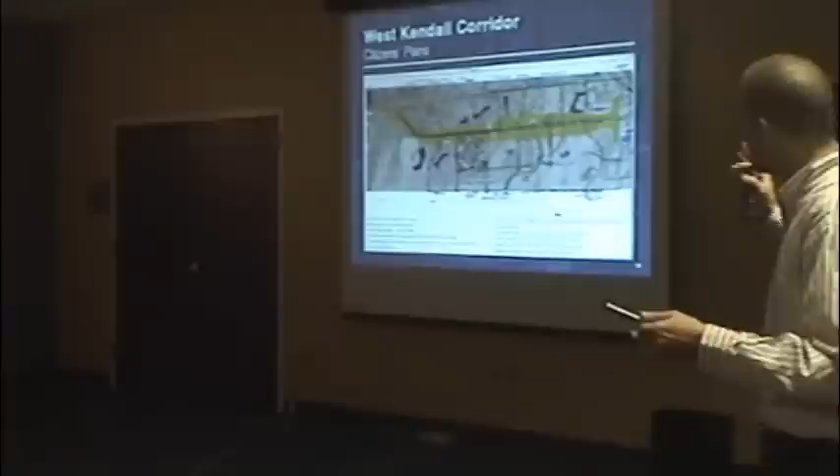Reviewing the actual citizens' plans, you can get an idea of the drawings that were developed and some of the ideas. I won't go through the whole list, but the consensus was mainly those six or seven ideas.

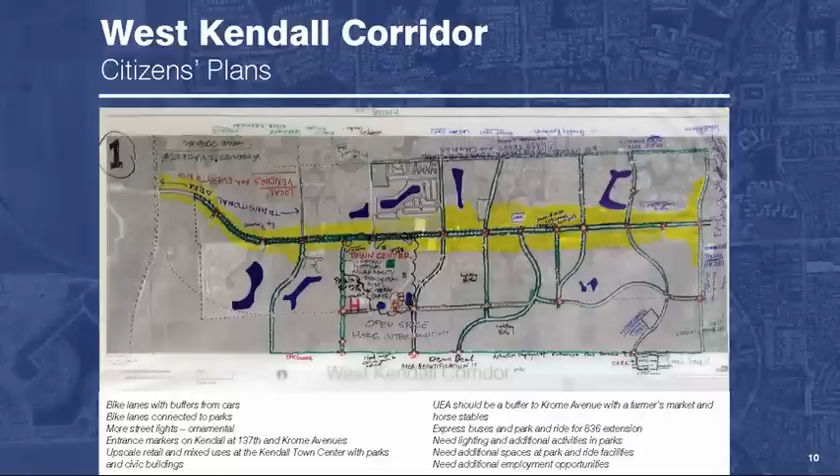You can see the town center, next to Baptist Hospital, an area most people were very interested in and really wanted to see develop into a town center. And then mixed-use development along Kendall Drive, to allow people to live and work in proximity to each other so they don't have to get in their car and drive for an hour to downtown, Doral, or the airport area.

More trees, landscaping, more shade — that was something else critical, because if you want to walk and you're in the sun, there's no shade, it's just not a pleasant experience. Everybody knows that, and it's something we have to work on.

Additional transit service, possibly a local circulator trolley, express buses. People like the Kendall Cruiser, but it's stuck in traffic with everybody else, so that's a problem — and how do you solve that? We have some ideas.

Mixed uses, more amenities, better retail options were also desired, along with a hotel or more. People want to be able to live and play in Kendall without having to go to Coral Gables, South Miami, or the beach, so they can enjoy their community. It's great to have the beach, but it's a hike from here, so it's nice to be able to enjoy your community on the weekends without feeling a need to drive for a half hour or more.

This was the kids' map — you can see we had some future artists there. You can see ideas like the trolley, circulator service, and a farmers market out in the UEA area, or the expansion area.

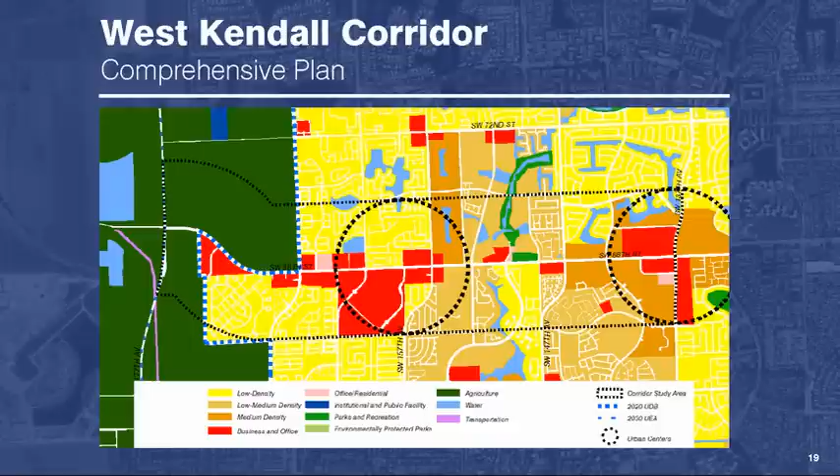The good thing about the urban centers is that they allow a lot of things that you told us you'd like to see, which is mixed uses, pedestrian scale type buildings, and things like that. So we have some planning tools that we can work with that will help achieve what you told us you want to see.

We'll go through the various sections here. The first one is redevelopment. I'm sorry the map is not that great on the projector, but there's not a whole lot of redevelopment opportunity in Kendall because a lot of things are pretty new here.

One exception is the Kendale Lakes Shopping Center at 137th Avenue. I don't know, any old timers remember when it looked like that? If you look at the map, that's actually the old Wometco Movies, right in the middle there.

It's a lot better than what's there now. So yeah, this is what we got now. The mall kind of disappeared, and now it just became a typical strip mall. And you told us that most people are not very pleased with the way it looks and functions right now.

Looking at the redevelopment opportunity here, there's a large parking lot, and it's probably underutilized. So the parking area could be infilled with buildings to try and create a more urban scale along Kendall Drive. Over time, additional buildings could be added.

A kind of pedestrian scale street could be created along the existing strip shopping center, where the parking areas are within actual building blocks. So you have a block system developed over time.

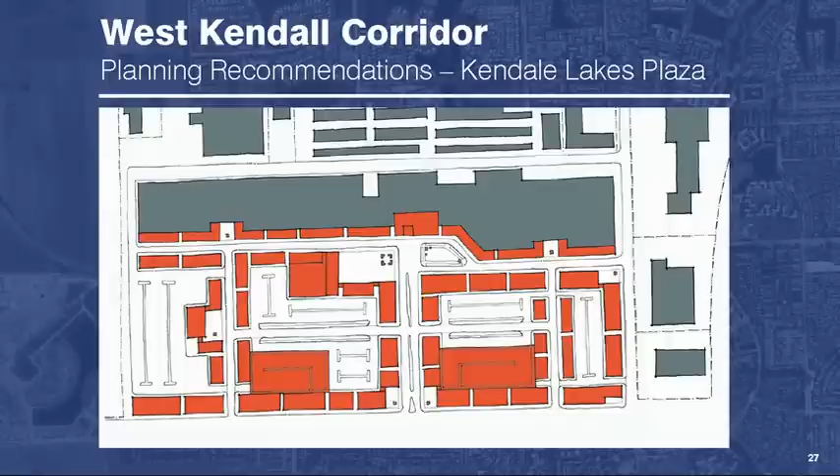And then over the long term, even parking garages could be constructed to allow for sufficient parking, but a much higher utilization of the land.

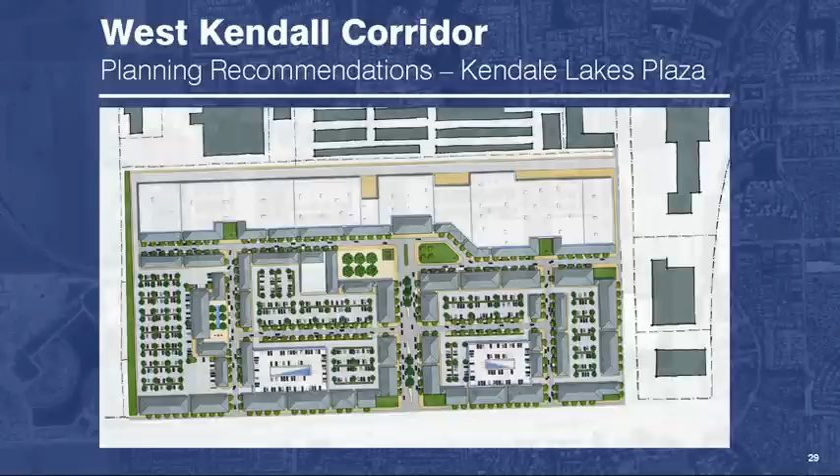And then looking to the north, there's the existing mini storage warehouses, and you've probably seen the trend in the mini storage industry is that they're going multi-level. So these are one-story mini storage buildings, and if they could be put into a multi-level type building, then there we go. Possibly the north half of the shopping center could be redeveloped to something that would be compatible with the residential areas north.

Is this 82nd Street? 84th. 84th. And so the people who live up in Kendale Lakes here could actually walk down a pleasant street scale environment here into a small scale town center type environment.

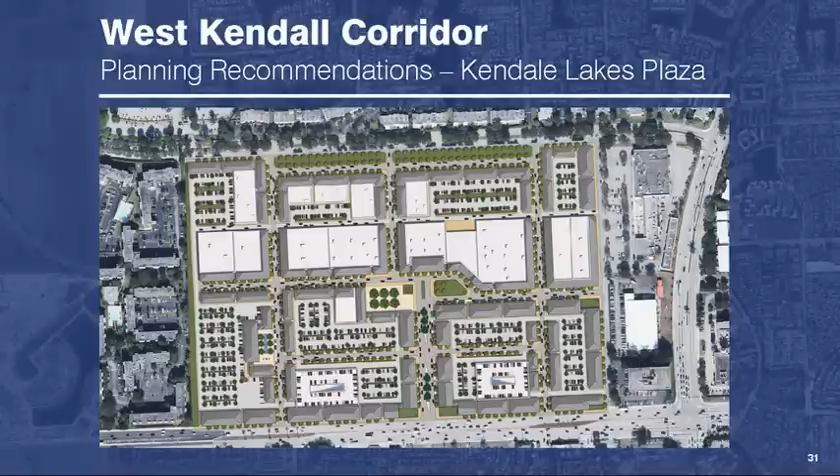And again, so this is a concept. But this is consistent with the fact that this is an urban center, so this type of development will be permitted by our comprehensive plan right now. I just need somebody to come along with the vision to do it. So that's always the challenge.

So anyway, this is about 45 acres, and potentially you could have almost 1 million square feet of office space, 620,000 square feet of retail. There's about 400,000 square feet of retail space there now.

Maybe about 600 units of residential, more or less. This is just an estimation of what could be built there. And even though, remember, you got 45 acres, it's only 15 units an acre at 680 units, and that's about similar to the other apartment developments that are surrounding the area.

So anyway, that's one look at what could be done in terms of redevelopment. And for policies, we have the policies in place through the comprehensive plan. These properties that are located within the urban centers should be developed with the urban center standards.

Mixed uses should be encouraged, and pedestrian connectivity should be required as things redevelop, so people can walk to their shopping areas and so on. The next group of recommendations are street improvements. And there's a lot of discussion about the shade and people want to walk, but the streets are not comfortable enough right now.

This is one example that was brought to our attention: along 152nd Avenue between Kendall and 80th Street, people are parking along the swales, and the swales get torn up, turning into dirt and rocks. It's very unpleasant. If people are parking on the swales, you should have on-street parking instead, because right now you have something that looks very unpleasant and disorderly.

You add a curb and gutter and some little bump-outs for trees in the parking lane, and you get a streetscape that's attractive, yet still allows people to park, because there's obviously a need for parking in the right of way. The other good thing about on-street parking is that when you're a pedestrian on the sidewalk, the stationary cars buffer you from traffic, making it a much more comfortable environment. The additional shade helps as well.

This is another issue brought to our attention: 149th Avenue, south of Kendall, adjoining the Presidente supermarket. Again, you have parking in the right-of-way, and when you don't have curb and gutter, the parking goes into the swale. The swale gets torn up and looks very unpleasant. Adding curb and gutter keeps people from parking on the swale. Having a dedicated parking area keeps the swales from turning into dust and mud pits, potholes. With additional shade, you get a much nicer, pleasant streetscape that people are pleased with.

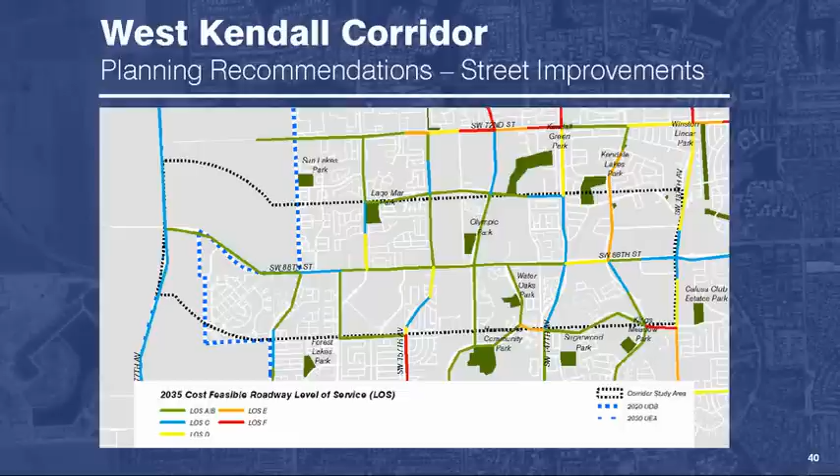So what that means to us is that if you have four lanes right now, and in 2035 it's still level of service A or B, you probably don't need all four lanes of traffic. So what can you do? You can take that 10 feet on either side and add a landscape strip and a bike lane, and possibly take those painted medians and landscape them, and you suddenly have a streetscape environment that people would be willing to use and ride their bike on.

Of course, the challenge is you have existing infrastructure. A lot of these roads were paid for by developers - the county didn't pay for those roadways. So how do you go back and retrofit them, as we're showing here? That's the real challenge. The challenge isn't the technical configuration of the roadway, because there's enough right-of-way. The challenge is how do you go back and fix what people are not happy with.

Another option, instead of the bike lane, is to potentially have a 10-foot sidewalk, wide enough for a shared bicycle-pedestrian facility, because a lot of people told us they weren't happy with bike lanes. They don't like sharing the roadway with cars - people drive too fast, and so on. So that's another option possible within that 70-foot right-of-way, if you don't actually need the four lanes of traffic.

One thing to note is that the congestion is really only at the intersections. So you may not be able to do this when you get close to Kendall Drive - you may actually need all four lanes there. But when you get 500 feet away from the intersection, you can actually start to do something like this.

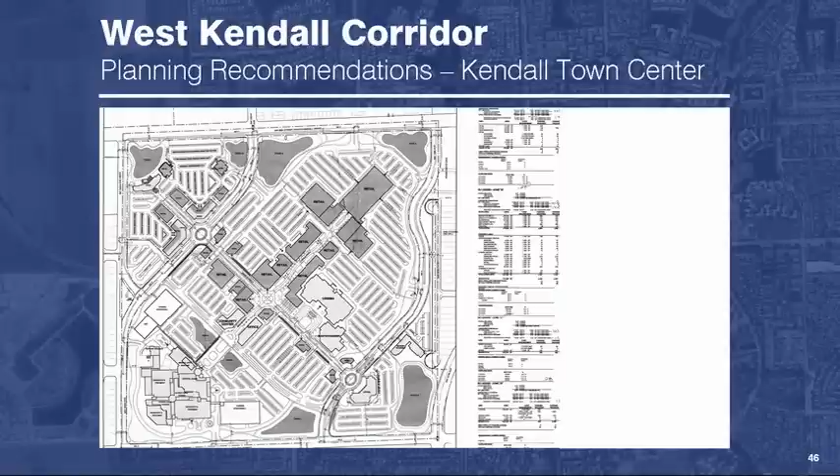So we were looking at coming up with a concept to illustrate both the urban center standards, because again, this is in an urban center, and the concepts that you told us that you'd like to see.

Beginning with the existing roadway network, this is Kendall, this is 96th Street, this is 162nd Avenue. I forget the number here, 159th or something. But anyway...

Looking at the existing development that's already built, the hospital is already here. They own this vacant piece of property here. This is the assisted living that's under construction. And then there's the transit terminal.

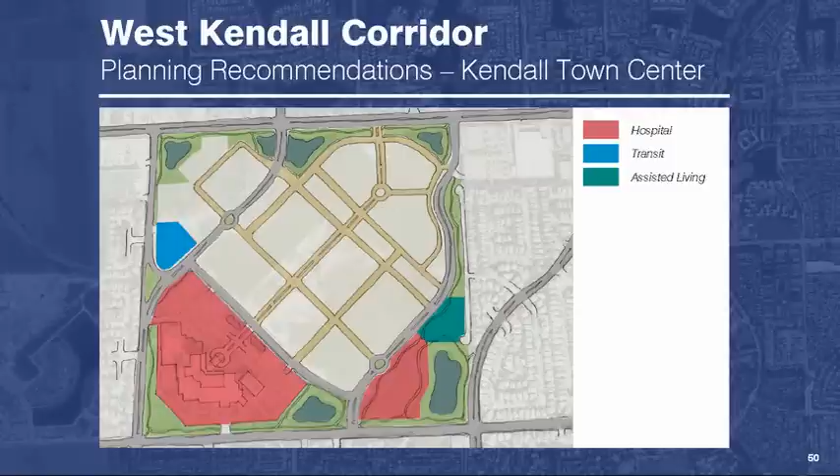The first thing we looked at was developing a block system, because that's important for pedestrians. People are comfortable walking when they know the block sizes and so on.

And then looking at different uses that could fit into these blocks. One of the important things that people told us was additional retail, the movie theaters. That's something everybody wanted to see, was additional movie theaters in the area.

And then having mixed uses, such as residential, mixed-use residential and retail, or residential and office-type buildings. So people can live and work in close proximity, and also close to the entertainment, retail, and restaurants that would be located here.

And then you can see the open space, some additional open spaces that are possible, so people can enjoy, not necessarily come to shop, just enjoy the quality open space.

So this is the concept that we came up with. This is Kendall here, looking to the northwest. This is the existing Baptist Hospital, the assisted living building that's under construction. And you can see the kind of retail complex here with the block system kind of oriented towards Kendall.

And then a significant open space. It could be used for different community events and farmers markets and so on. And then some more retail and these mixed-use type buildings that could contain office space, residential space, retail space, and so on. And again, this is all within a block system that really encourages people to walk around and enjoy the environment.

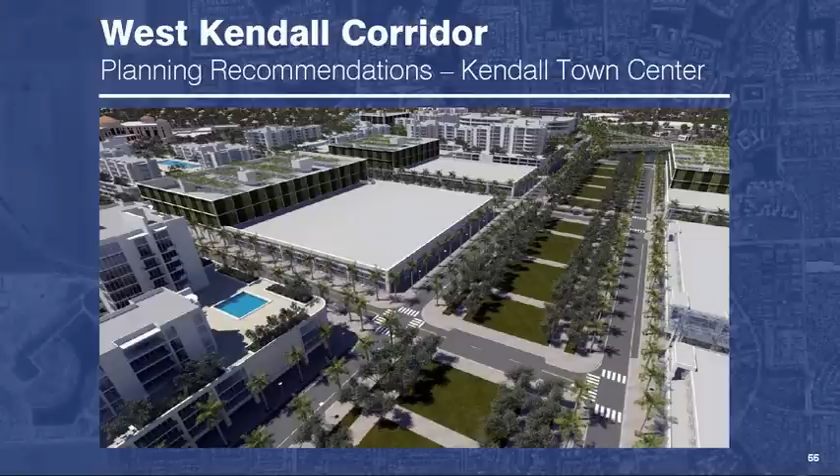And again, you can see the open spaces to kind of connect the whole property together. There's that open space again, kind of between the retail on Kendall and the mixed-use spaces to the south. So anyway, you get the idea.

Well, palm trees are just for illustration. If you do shade trees, they hide everything else.

But anyway, one of the important things here, again, when you have sidewalks along Kendall, and the traffic is going 50 or 60 miles an hour, nobody really wants to walk along that. So it's important that the sidewalks be separated from the travel lanes as much as possible, and with shade and so on.

This is an approved development of regional impact. So what that means is that they have a development program that they're kind of fixed with. To do what we're showing, that would have to be modified by the Board of County Commissioners.

Okay, looking at transit, the potential for future transit. This is the existing park and ride at the church. This is at Hammocks Boulevard right here. And yes, the Target is right here.

One of the problems with this park and ride is that people don't like to use it because, going east in the morning, you have to cross Kendall, and nobody wants to do that. Transit is working on acquiring some property to actually have a bus turnaround here, so the buses can come in, do their drop off, and go back out, so people parking in the park and ride don't actually have to cross Kendall to either enter or leave the bus.

Let me interrupt you for a second, think about when I talk about that the county doesn't really think about planning. We all know that in the morning we all go east, right? So if we're all going to do a park and ride, what you probably want to do is put it on the south side of Kendall. Yes, because that's where the east traffic goes. Where did the county put it? No, on the north side. So basically, you have to go north, then west, then make a U-turn to go east. So somebody in transit was not planning. They just did it just to do it, and that was where there was a piece of open space, and they threw it in there.

It wasn't these guys, but him. He gave me this presentation, so I always tell folks, it's the county. They may have the good intentions, but they're not the ones who are sitting there really thinking about how things operate. Because when I saw that, I go, that makes no sense at all. Why would you put it on the wrong side? Because it makes sense when you're coming back, you're coming west, so then it makes sense to be on the north side. So just a little example of what happens in the county and how they go about planning. So again, he wasn't responsible. I just want to make sure that's clear, because I know he gets a little nervous, you're going to take me out here in the parking lot. I'll take the blame for transit anyways.

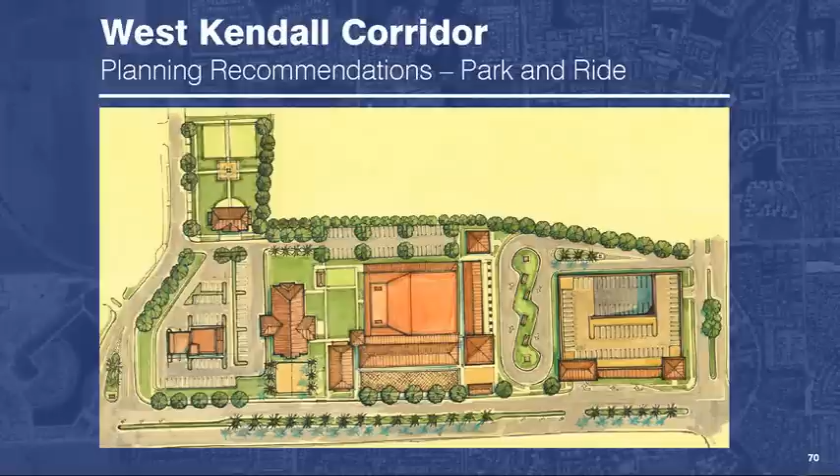And hopefully with some additional development, some retail spaces, convenience retail for people who are coming and going from the bus, to be able to stop and pick up whatever they need or get a coffee or whatever it might be.

As far as the actual bus service on Kendall, the Kendall Cruiser is great, but it's stuck in traffic with everyone else. A few years back, the MPO did a study looking at Kendall Drive and the potential for mobility enhancement. They had several alternatives for modifying Kendall, but only one had dedicated bus lanes, allowing the bus to go faster than the rest of traffic. However, they didn't detail what would happen at major intersections with left turns—would those turns be shared with the bus lanes? It wasn't explained. So we wanted to look at solving that, especially since the right-of-way is constrained. You really can't expand it without spending an extraordinary amount of money buying additional right-of-way, tearing down apartment buildings, shopping centers, whatever.

So what's the answer? You go up in the air. This is what we came up with.

Great idea. Okay, great idea. So again, it's an option. Listen, people want bus rapid—that's the option. This is bus rapid transit, and this has been done around the world, in other countries. And we need some landscaping though. Little landscaping, we'll paint it green. Little green in the summer.

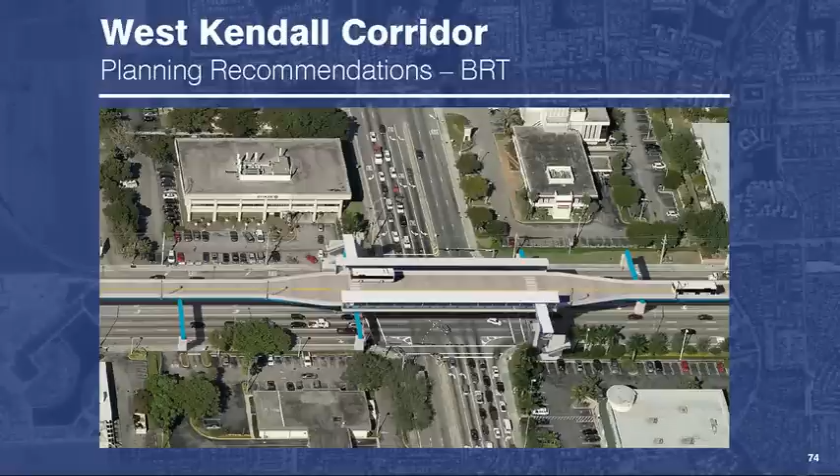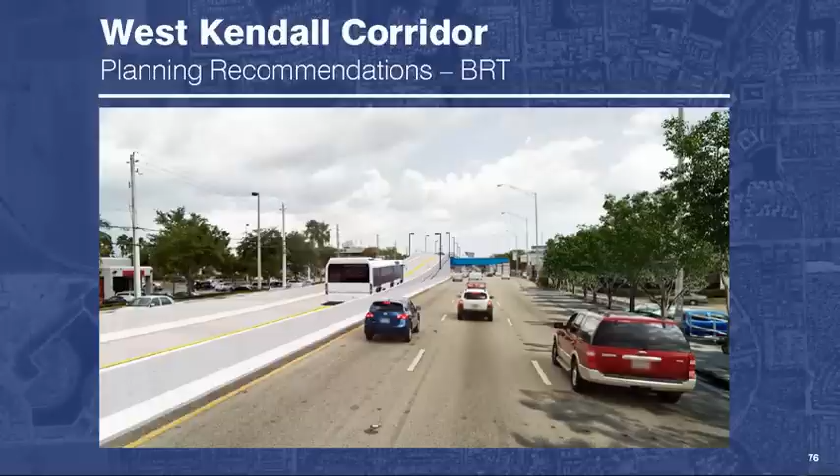So what would happen is that at the intersections, you would lift those dedicated lanes above the intersection so people can continue making left turns, because otherwise you're cutting off accessibility throughout the whole area. So essentially the operation of the intersections would be unchanged, and between intersections the bus could be at grade level. Here's a view of what that could look like, this is looking east toward 137th Avenue with those dedicated bus lanes where the median would be. And here's another view looking west at 137th Avenue along Kendall, and that would be the actual bus station.

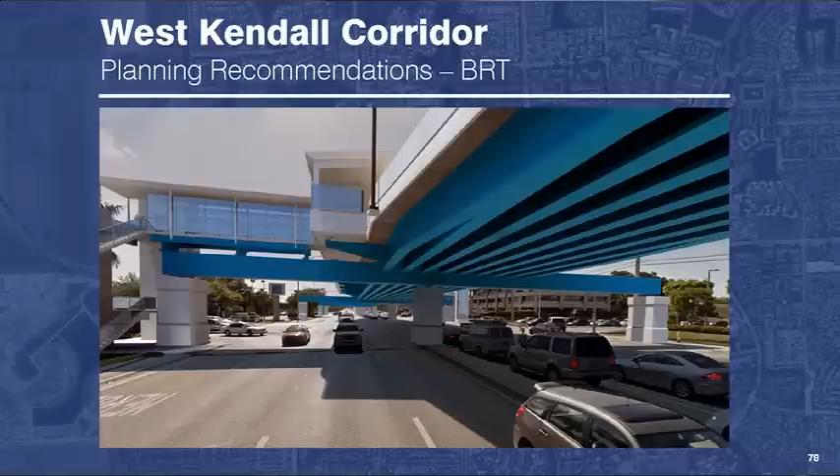So again, it's a concept. Whether it's realistic or not, that's a good question—that's for transit to figure out. But again, this would do a lot to allow people to travel on Kendall much faster than you can today.

Let's see, our next recommendation for transportation—sorry, we're at long-term development. Long-term development is essentially out here in the urban expansion area. We had suggestions from people about what they wanted to see for future development: mixed uses, more open spaces, workspaces, light industrial or flex space, things like that. Again, so Kendall isn't exclusively a bedroom community, so people can live here and work without having to travel extraordinary distances in a lot of traffic.

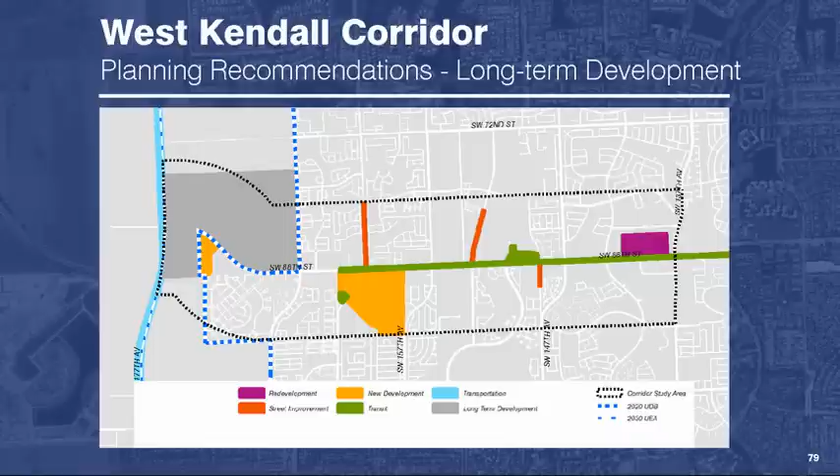So we wanted to look at this area. Again, it's in the expansion area. We don't necessarily advocate moving the UDB, but within the expansion area, the comp plan anticipates that the UDB line will move in this area by 2030—that's how the policies are written. This is, I think, 167th Avenue looking west, there's Krome Avenue out there. So this is the UDB line now, and we're looking at what could happen in the future.

Again, this is the expansion area boundary at Krome Avenue. This is the current UDB now. Show them where my office is at—and yes, the commissioner's office is right here. What is this, 165th? That's one. No, yeah, that's 165th, I guess. Yeah, that's 167th.

So anyway, this is the comp plan, and this is what it has to say about the UDB: it's likely that after 2020, we're going to need to expand the UDB to allow for future development because we're not going to have any land left. Now that may or may not be true, depending on development patterns within the urban area, but it's likely. So if the comp plan says it's likely, we should probably plan for the future whether or not expansion is actually warranted. So don't take this as a recommendation to move the UDB—that's not what we're saying here. We're just saying we should look at the area and try to anticipate future needs.

Similar to the other examples, one of the most important things is to develop a block system, because that's one of the things you told us - there's no connectivity, our developments are all isolated and disjointed, and we can't walk anywhere because nothing is connected. So although this area is owned by different property owners, that doesn't mean development can't occur in a coordinated fashion, so that a block system can be developed in a rational manner, with connectivity between future development in this area.

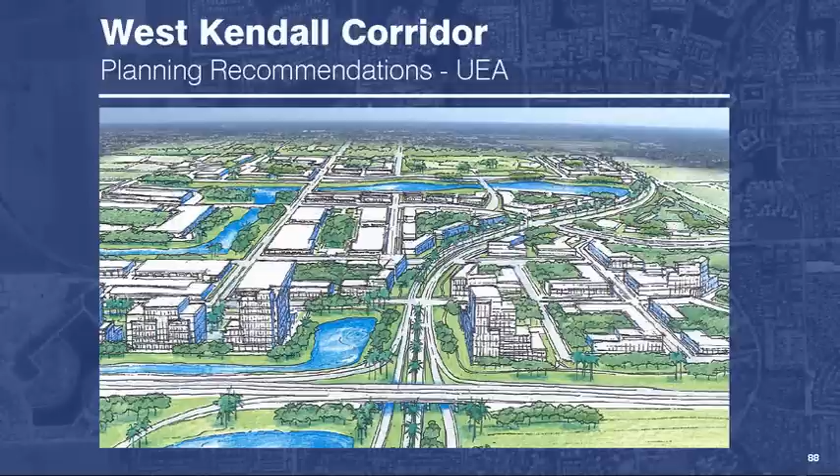For policy recommendations, the CDMP doesn't really have anything specific about future development in the expansion area. So something we should consider is including something in the comprehensive plan that talks about the character of development - what should happen if development occurs in the expansion area - such as an open grid of streets, connected open spaces and waterways, and buildings that contribute to an urban scale, pedestrian scale environment. Mixed uses should be encouraged, and pedestrian connectivity is very important.

Now for the next steps - that concludes our recommendations. The next step is we need to hear from you. You need to tell us if we're going in the right direction, if we missed anything important, or something that we looked at that you don't agree with and should be left out. We need to hear from you.

So once we determine that you're pleased with our recommendations, we'll develop our plan report, which will go to the Planning Advisory Board and then on to the Board of County Commissioners. That concludes our presentation, and I'm waiting to hear from you.

And as I promised, the nice lady in the front here. Well, I'm glad you decided I'm a nice lady. You may not like me after my comments.

One of the things that, if I'm not mistaken, we talked about that Saturday at Varela, because that was the only meeting I was able to attend - we talked about having community gardens, something for the children in particular to participate in. We talked about having nature spaces where wild animals and paths where children could observe nature. I didn't see anything like that there.